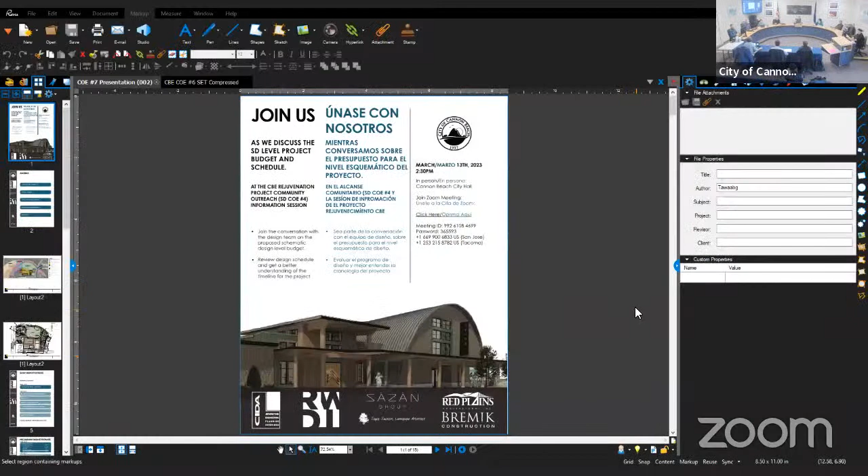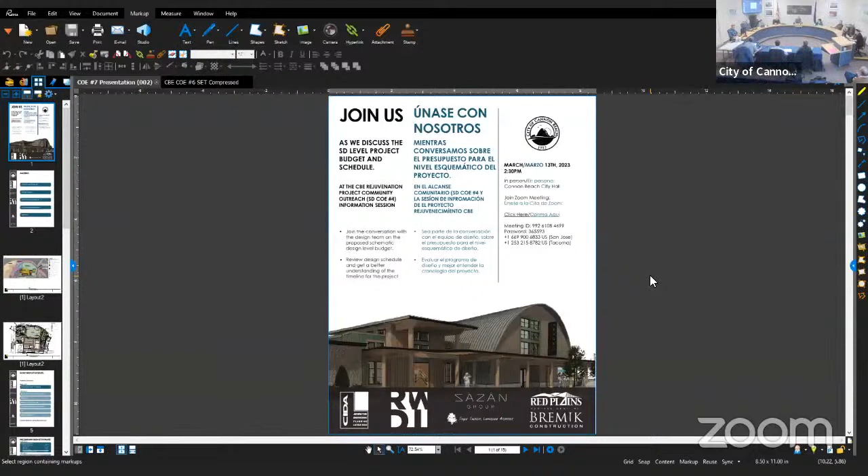The Cannon Beach Elementary Rejuvenation Project started off with a robust public input process that indicated there was pent-up demand for a facility on the Cannon Beach Elementary site that would be enjoyed by residents and visitors alike. Dustin Johnson of CIDA will go over the results in more depth in a few moments, but what came out of the effort were visions of capturing our local history, learning about Native culture, protecting the environment, bringing local folks together, providing a peaceful place to think, a place to exercise, and celebrating the elementary school that was such a big part of this town. That's what people talked about. And what Dustin is about to show you is what those things look like when brought together in the design of a facility on a site that also contains an abundance of all those good things.

Today's the first step in how do we really make this happen. We will have budget figures based on the preliminary schematic design drawings. These are rough figures and hopefully lean towards the conservative side. They will be refined as the project moves forward. With that, I'll turn it over to Dustin Johnson.

All right, thank you, Bruce. And I've been forewarned that my voice doesn't carry very well in this space, so if you're having trouble hearing me, signal me and I'll know to turn it up a little bit. I'm on the desk, there you go. Well, as always, I have to take the opportunity to just tell you how humbling and what an honor it is to be here working in Cannon Beach and on such a special project and a special site.

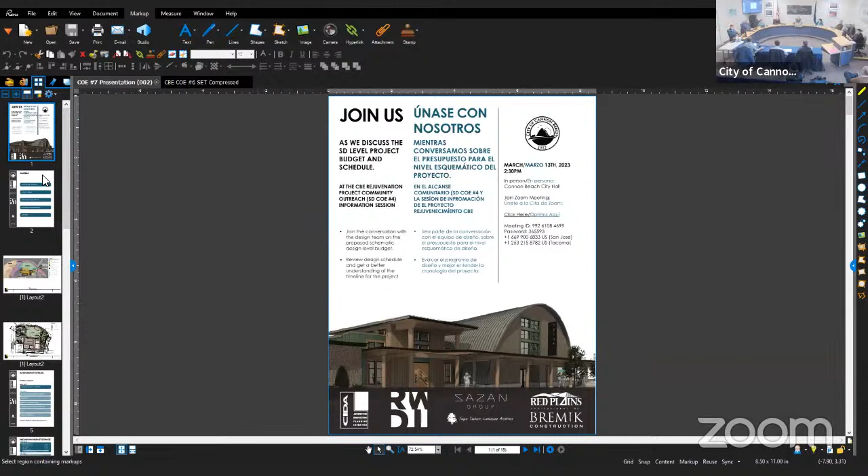So I'm sharing my screen right now, I'm going to zoom in a little bit. This is our agenda for today. Bruce just did introductory comments. I'm going to give you a little bit of history on the project, similar to previous COEs. Then we're going to talk about what all is entailed in a project estimate, what do we look at to make sure that we're capturing everything holistically. And then we're going to present our project-specific budget estimate for Cannon Beach Elementary Rejuvenation. And then after that, we'll talk about next steps.

Moving on down, zoom out here. This probably looks familiar to some, either because you were here during the programming phase and you saw this slide, or hopefully, for those of you who weren't, it resembles strongly the current design of the project. The programming phase happened approximately a year ago.

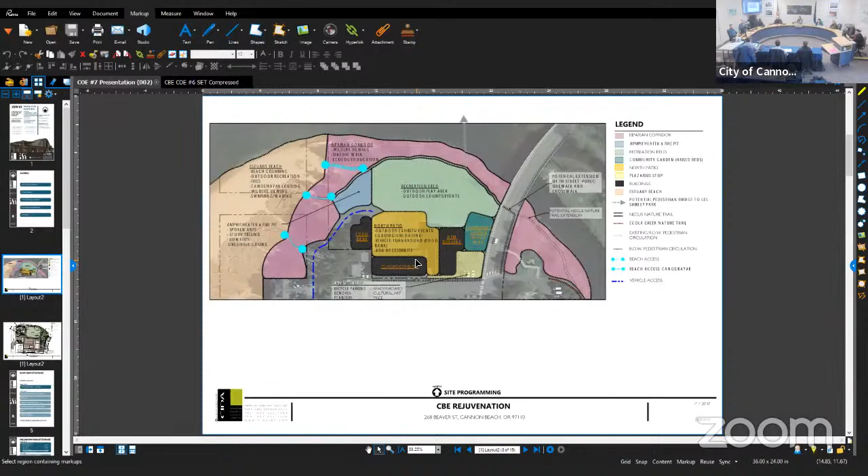It was a 2 to 3 month long process, involved 3 community outreach events. We talked to anybody willing to talk to us, took notes, handed out surveys, collected information, organized it, prioritized it. Out of that came this exhibit that you're looking at, including probably 1,000 pages of notes and surveys and other stuff, but all of that boiled down graphically to this site plan. Dustin, you blow it up. Thanks, you bet, okay.

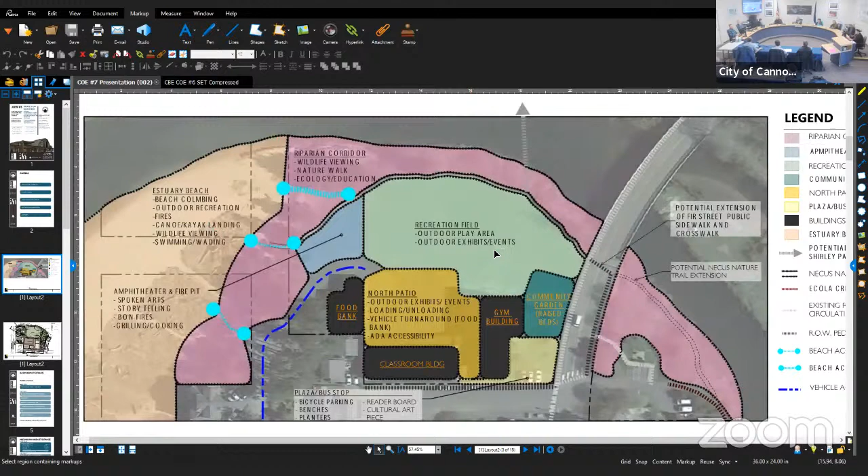You'll probably notice that bottom yellow block in the southeast corner of the site. That was an entry plaza that folks wanted, a place to be able to congregate at the site and start learning about the history of this site. The north patio is in gold, again another communal space, gathering space that could potentially host things that could bring tourists to the site. These could be exhibits, outdoor exhibits, they could be farmers market style events. I know you all have a current farmers market in a different spot. You see a community garden just to the north of the Southeast Plaza. This is currently where our Thunderbird garden is, and it has transformed a little bit from a community garden to more of a cultural heritage garden.

The recreational playing field is a huge asset currently for Cannon Beach, and no one wants to see that go. You see an amphitheater there in blue. It's been further defined with collaboration with the tribe, who had the original idea of having an amphitheater out here, at least as I understand. This was quite a few years ago.

In the current design, it's no longer just an amphitheater. It's an intimate storytelling circle and fire pit that can be expanded out to accommodate a larger crowd for something like a music event. And then the riparian corridor that you see in pink along the edge—another very important thing to stakeholders we noted during the programming phase was to make sure we didn't do anything that sacrificed that corridor.

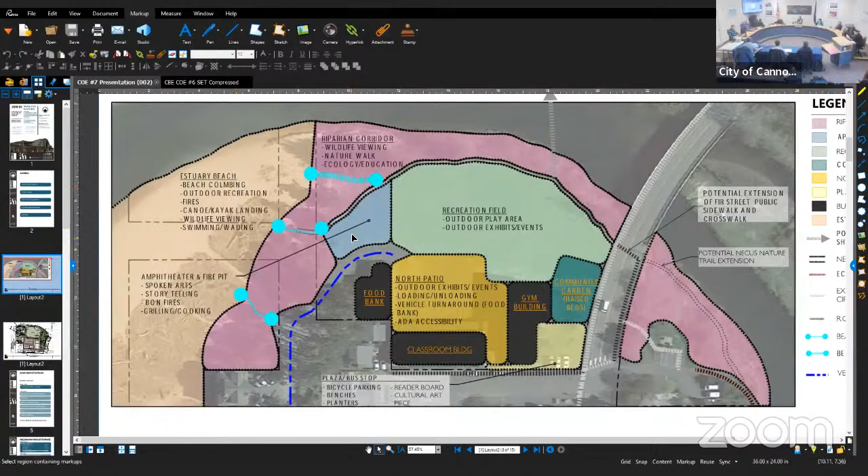So again, the Southeast Plaza down here at the southeast corner of the gym—a place to gather, an activation point for the site. Just to the north of that, our community garden, which has become the Thunderbird Garden, a heritage garden.

We have our north courtyard. Throughout the design process, we've added outdoor covered space on three sides of that north courtyard. You probably got sick of me saying it during design, but versatility, versatility, versatility—this was one way we can do that. We can have more outdoor events in more types of weather conditions if we have covered space.

We've got our amphitheater, which is now also an intimate story circle. And then, of course, Necus Park, the playing turf that's there today.

Scattered throughout, we also have some site structures next to a heritage playground that's part of the bigger heritage garden. We have an open-sided, longhouse-inspired structure—again, covered space for the outdoors. The more we have that, the more it's going to get used throughout the year. And again, over by the amphitheater, another longhouse-inspired structure, likely open-sided.

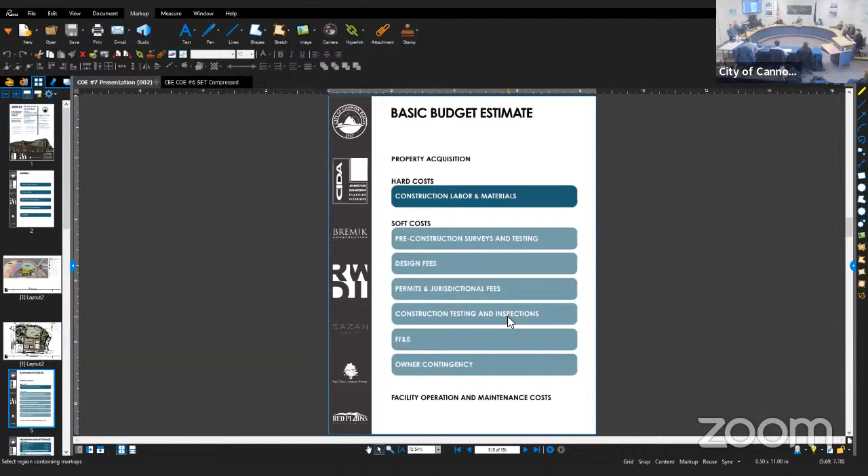And then we have an owner contingency. We always recommend that the owner carry a contingency for those unforeseen things. We do the best we can to make sure that unforeseens are kept to an absolute minimum. But it would be a mistake to say, don't worry about carrying it. So we always recommend at a very minimum 5%, even up to a 10% owner contingency.

And then beyond that, if this was a private development, we would be talking about facility operation and maintenance costs, and looking at the whole thing as basically an asset and making sure that this is a wise investment.

This is different because the ultimate goal here is twofold. It's to bring in more tourism and tourist-related dollars. It's also to preserve an incredibly special and historic site. And it just so happens that this type of space is going to fill the need and be a huge asset for the locals, both indoor and outdoor activities.

With that, we'll jump right into the budget. Do we have any questions at this point as to what we look at in a budget? Okay.

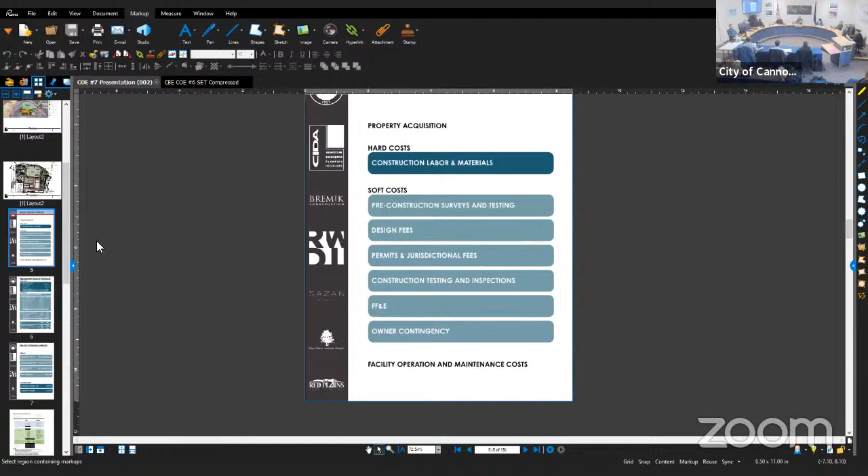I'm going to zoom in here. And Ben, I'll ask you to take it away with.

Of course. And I second what Dustin was saying. So we're also honored to be part of the team and to work with you all on this. So Ben, you want to introduce yourself?

Of course. So my name is Ben Carlson with Bremik Construction, and this is my colleague, Dave Brookings, also with Bremik. Dave will be the construction manager during the project, and I'm working on the front end side, helping to program the project for success during pre-construction.

So as Dustin mentioned, the construction hard costs, another way said, it's kind of all the stuff left behind. This is what it takes to build the project that's the dream of all of us to deliver for Cannon Beach. And what we've done is taken the construction hard cost and broken that down into these various different elements here. These are really a summary piece of what we put together for the estimate, which fits on the slide a lot better.

But just know that behind this, there's several thousand lines of data that we've worked hard with CIDA and the Cannon Beach team to develop for the project. And so we've really broken this down into these different elements here.

One is selective demolition related to the project. The actual building construction, which has to do with the redevelopment of the buildings themselves and the reskinning of all the buildings. The utility upgrades and site development kind of go hand in hand. There's a fairly robust site development portion of the project as well as landscape.

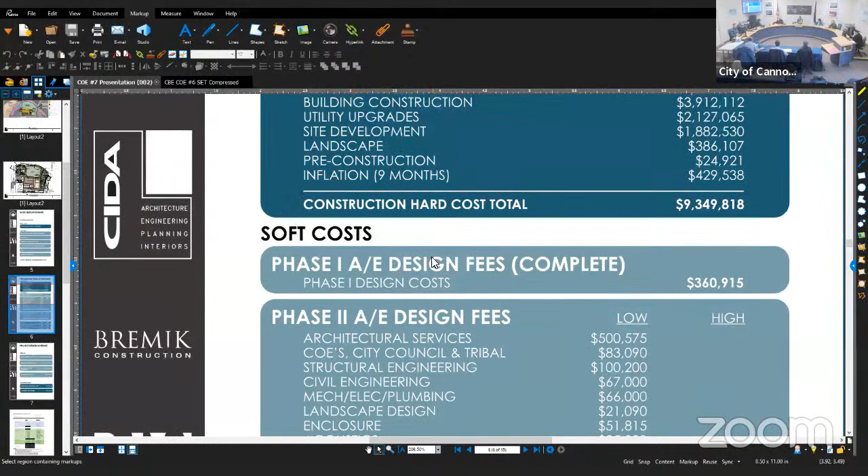So we move on from hard costs to our soft costs. This first number here, that 360,915, those are your architecture and engineering fees from day one on the project through today.

And this is not just CIDA, this is CIDA, this is Red Plains Civil Engineering and Planning, Joyce Jackson and her landscape team, Sazan with their mechanical, electrical, plumbing, RWDI with their sustainability studies, acoustical engineering, and their thermal envelope consulting.

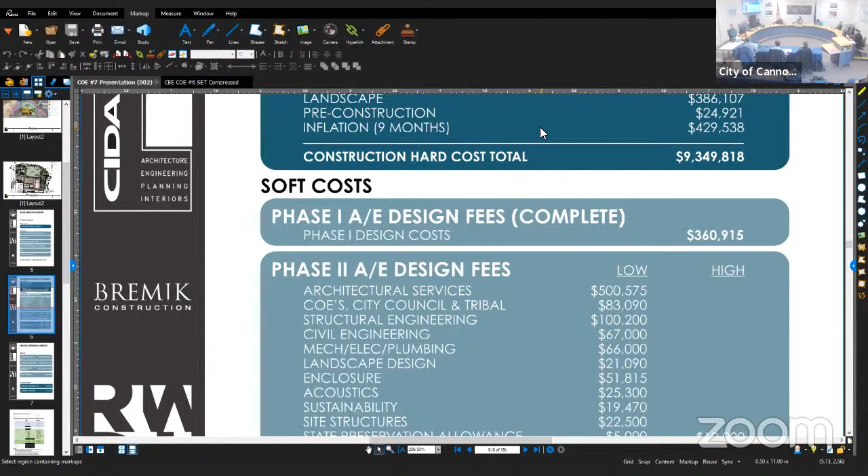We're not proposing making any changes to that design team moving forward. So as we move from phase 1 A&E fees to phase 2 A&E fees, we still have those consultants taking their designs alongside ours to that next level of working drawings.

We're factoring things in and separating them out now that we have a better idea of what the process is for this particular project, and no two projects are alike. This one, can't stress enough how unique it is from a process standpoint.

But we want to make sure we're looking historically on the types of events we've had, level of involvement we've had with the public, with tribal members, with city council, and we're carrying that through. So you know now with this budget, what to expect in terms of CIDA and our consultants and our involvement moving throughout the course of this project.

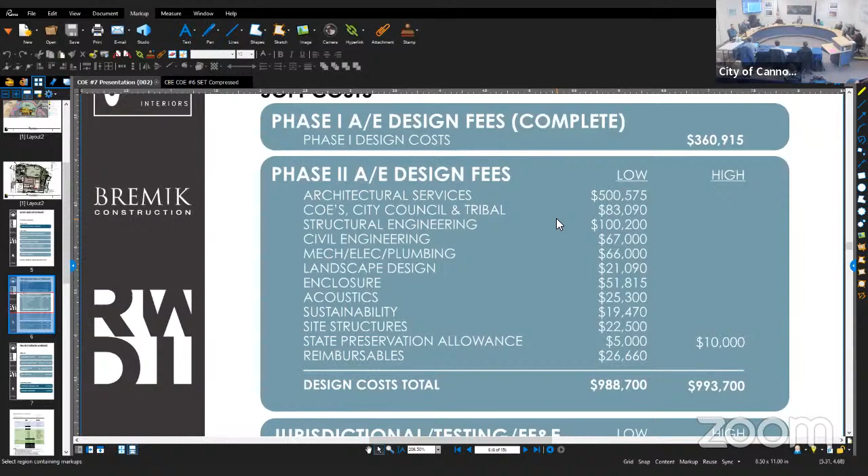We're going to work with Bruce. We haven't had a chance to really dial in our services and see if we need that level carried through to the end of the project. And we're going to be working on that before we come back to you with our revised budget. Bruce will talk about that in next steps.

Another thing that we have carried in here is the state preservation allowance. This is the State Historic Preservation Office, and they are who has jurisdictional say on how we're disturbing the earth out there on a highly sensitive archaeological site. They have their own process, which we're going to talk about schedule here in a minute.

Their process runs more or less concurrently with the land use process, but has some special caveats, and we'll talk about that here in a minute. There's a line item in there to carry that, to manage that process. Our consultants, Red Plains specifically, will be very involved in that as the civil engineer.

You carry a geotech engineer as part of the owner's soft costs. You already have a contract with them. They will be heavily involved as well during that process.

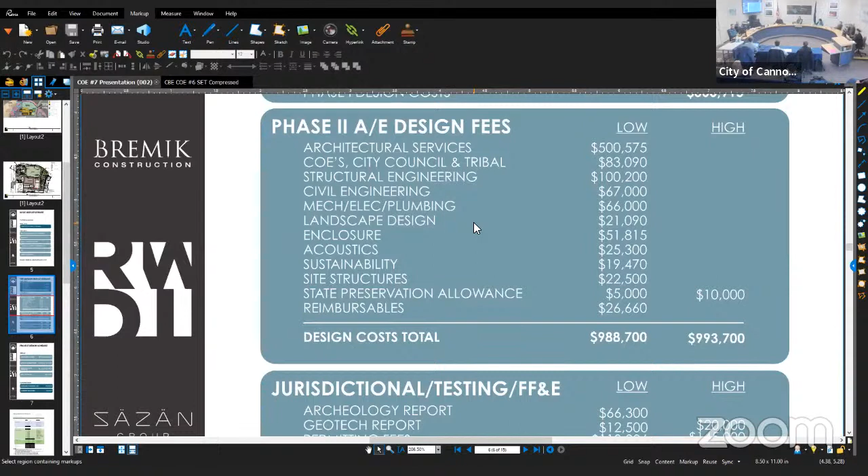And then jurisdictional testing and FF&E fees. Again, this is an extension of your soft fees, but these are not architecture and engineering fees. These are fees carried directly by the owner.

So again, your archaeology report tells us where we can modify the site and to what degree, what depths we need to start being cognizant of, but also what mitigation we have to do to be able to disturb the site. And that mitigation is something that has to be not only approved through the state, but also by the tribal members as well.

And then the geotech report tells us how structurally stable the soil is that we're going to be modifying. So even though we're not building a big new building on this site, we still have to take into account we have a seismic retrofit on that classroom building, or we're adding a couple of beams and footings in the gym, and we need to know what our allowable bearing pressures are. That test will also let us know if we can use the site for stormwater detention and release, to naturally percolate.

And some other things that we don't need to get into here. The FF&E, we talked about that.

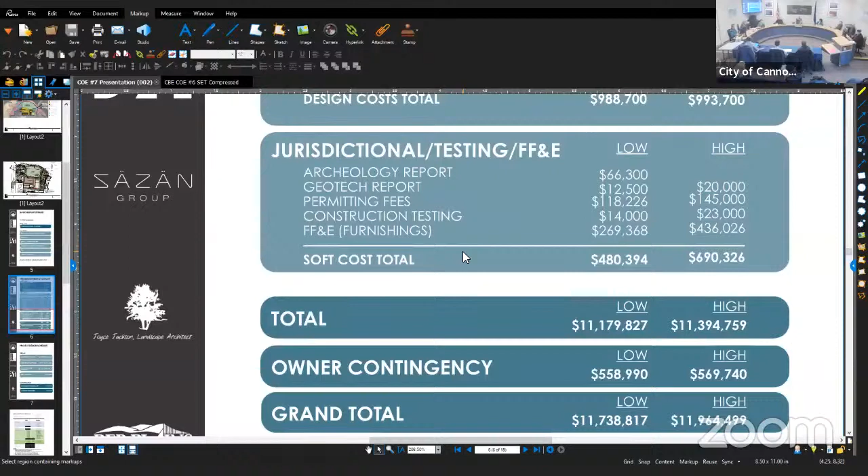Let me go ahead and just read this and then we can get into the questions. We're reaching the point where you can all get serious about deciding if this is a project the city can support and construct. Previously, there were too many unknowns to set a realistic budget. Next step is to investigate ways to fund the project, or to make modifications to the project design. We're ready for that discussion as soon as we can get it on your busy schedule. We will bring our financial advisor to discuss that aspect of the project in a dedicated funding discussion. Ready for that discussion, as I said, about the busy schedule. And I want to make the comment that both this project and the City Hall Police Station are doable, but it will take some bold action and a willingness to make hard decisions to make them happen.

So with that, is there any questions on anything presented?

Are we all in shock or what? Yeah.

And as far as the cost of the project, remember what we started out with is, what do you want to see? And hopefully we've accomplished those things, especially some related to education and the tribal history, and even the school. So that can be pulled back, but it doesn't take going too far back before all of a sudden it really doesn't work anymore. And those are some of the hard decisions you'll have to make. We'll make recommendations for you if you wish, but it is a council decision moving forward.

So earlier in the work, there was talk of phasing the operations. Is that off the table? No, it's not off the table, but there are probably chunks that we can go ahead and pull out and do them later.

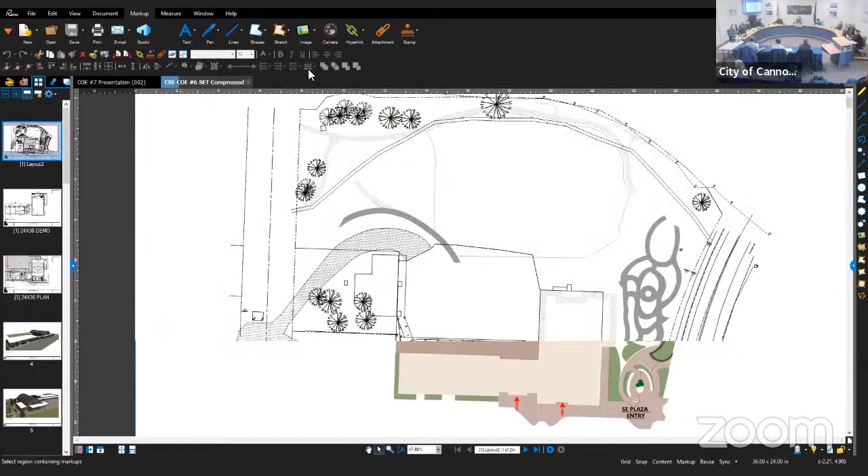Our next slide was showing how much of the existing school was going to be retained and incorporated. Justin, why don't you walk through that last drawing also? I don't think everybody has seen it all yet. Sure, through the site here. Yes, all right. Okay.

So hopefully this looks very reminiscent of that bubble diagram at the end of programming. We've always thought of the Southeast Plaza here at the southeast corner of the gym, right on the intersection of Beaver and Fir Street, as a place for people to congregate and to use that opportunity to activate the site. Driving in off the Fir Street Bridge, currently today, you've got a massive structure out there, one of the biggest in town, and really it's just quiet.

So in using this opportunity to celebrate a place of gathering, we had talked early on about making this a place to really try to activate and engage the drivers by.

Access just north of that is the Thunderbird Garden. This garden was developed in a high degree of collaboration with the Clatsop Nehalem tribe. It is intended to feature native plants that were valued from anything from medicinal purposes to crafts by the tribe.

In this area, those plants would have identification signs on them. And as you get out of the Thunderbird Garden and up further into the Heritage Garden and into that riparian corridor, it becomes you have the same plantings, but without that interpretive signage. So you kind of learn about the plants in the Thunderbird Garden, then you go out to discover them yourself beyond that.

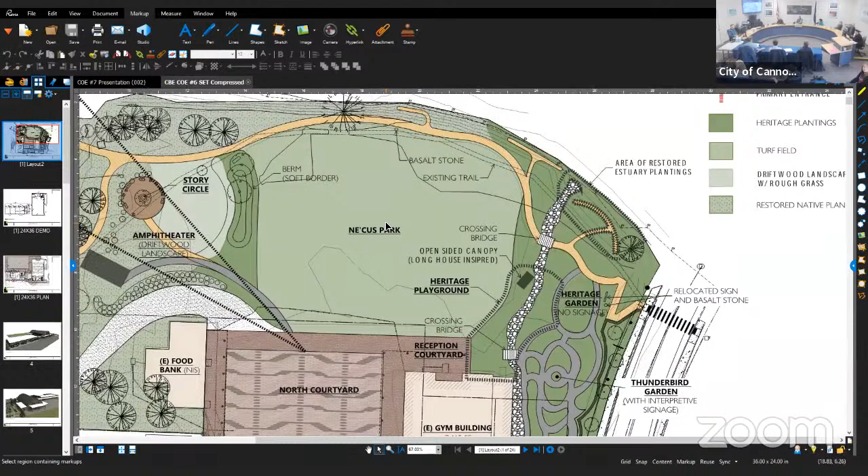And then, of course, Ne'Cus Park, the playing area, the playing turf, largely unmodified from today. And then to the west of that, our storytelling circle, again, developed in high collaboration with the tribe. Having that circle be a small, intimate space for reflection and storytelling, but also to be able to open up, what we have proposed is a driftwood landscape where people can sit, but not on anything so formal as benches and seats. In an effort to open that space up to a grander type of event, bigger audience.

I can just jump in quick. We're already collecting driftwood, yeah. We had a good season for driftwood with the storms. So a lot of that you see on the beach all of a sudden will be disappearing. Getting ready.

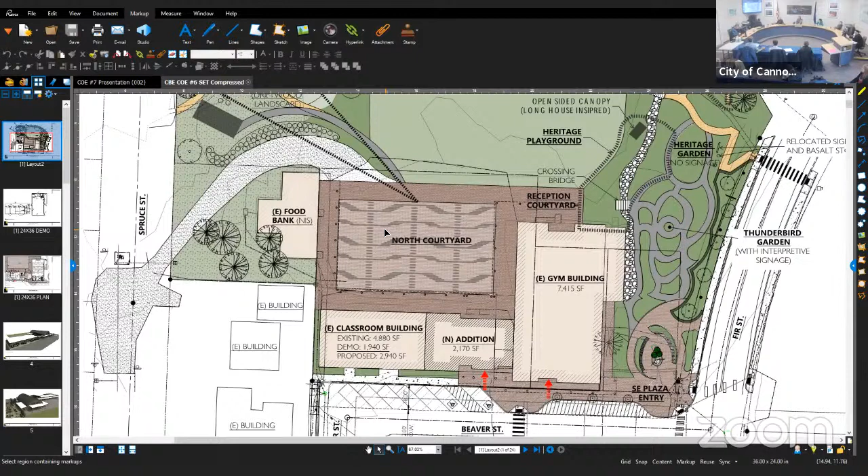And I think the last thing I'll point out on the site plan is the food bank. This was another one of those humbling areas where everybody seemed to coalesce around. The food bank is important, not just for the locals who use it, but extremely important for the tribe. They see this place as a place of giving. This was a stop for adventurers on their way up and down the coast, and they would show the necessary respect for another tribe. They would be given shelter, they would be given food. They see the food bank as an extension of that value.

All right, this is our existing plan. Just another thing about the food bank - one of the things that's always troubled us is that if we put restrooms in here, there's a whole beach area that is not served by a restroom. That's not the right mix if you're bringing in kids and everything else with something more formal. So what we've come up with is to put the beach restroom on the backside of the food bank, so that's where everybody goes in and out. That's something we're trying to do to avoid that potential conflict.

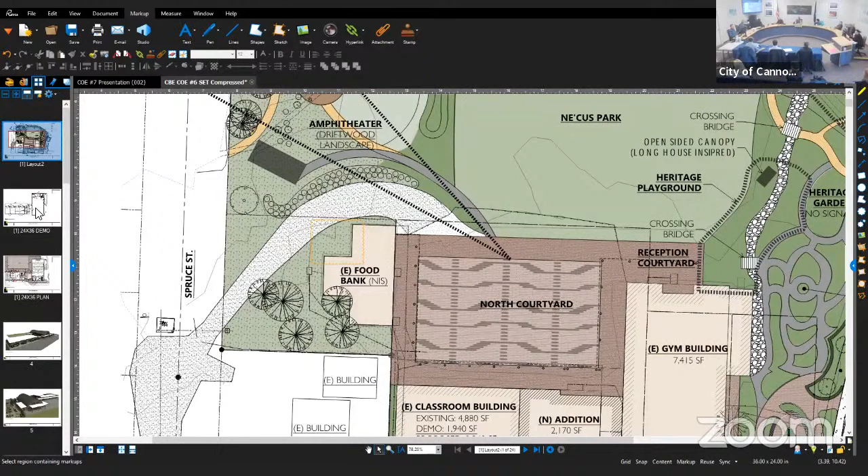I'll just draw a little cloud around that area so you know where Bruce is talking about. I think that's the corner you're talking about, because that's away from those spruce trees - someplace in there. I don't know if it'll be attached to the food bank, but the idea is there's a place that will get that service, but not necessarily coming into the lobby of the facility. Bruce, that is not in the scope of the project right now, though.

No, nothing that - the food bank is not. It'll be made part of their contract, but it'll be paid for out of the general fund. We really haven't talked about the funding side of the restrooms. That's something that could be within the scope because it is tourism related, so it's possible it'll end up there. Right now, we were just trying to sort out the potential conflict.

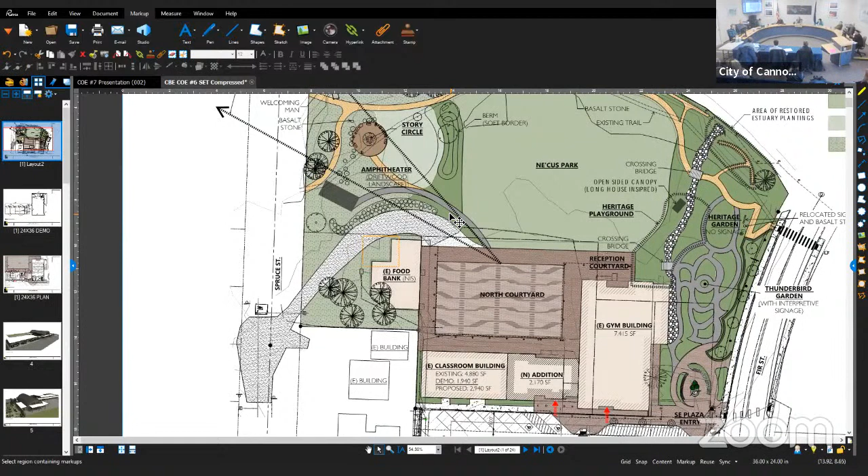So the demolition plan - in our existing building analysis, we determined that the existing mezzanine at the north end of the gym is highly unusable for anything on that second level or mezzanine level. The reason was twofold. Structurally, it's not capable of holding storage or anything else usable for that space, maybe a little light storage. The bigger problem was accessibility. For anyone who's been up there, there's probably 6 or 7 different floor levels that are abrupt, or in some cases upstairs, or a ladder or a couple ladders. So when we look at the type of mezzanine for this place, we want it to be more accessible, and also not at this end of the mezzanine.

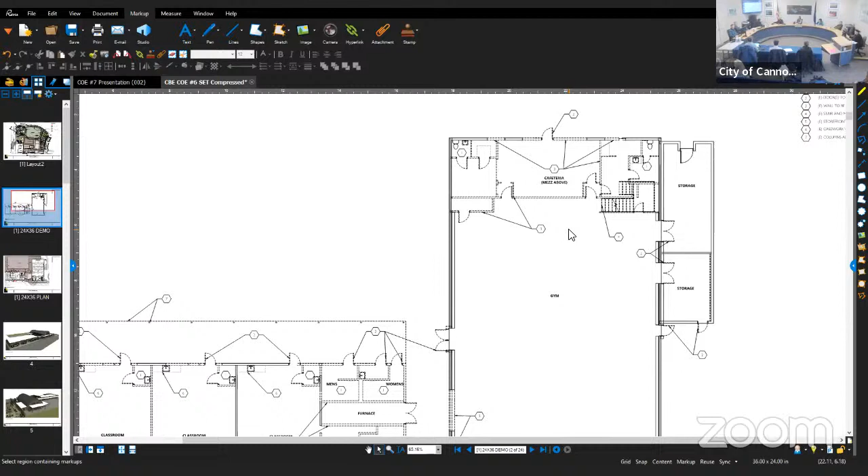That was another big piece of the programming puzzle. When people envision this space and envision being in it for whatever function is going on that particular day, they want to be able to see out the north end towards the estuary.

Over here at the classroom building, you'll see the existing breezeway is only about 12 feet wide. So we looked at schemes where we had very little demolition of that existing classroom building, but 12 feet in width was just not enough to do what we felt needed to be done from a cultural heritage standpoint and using our CBE entry lobby to educate visitors of this site. So what we proposed was removing that first structural bay - this is where existing toilet rooms, the furnace, all the electrical equipment, and a few offices are located - and then building that back and attaching the two structures together.

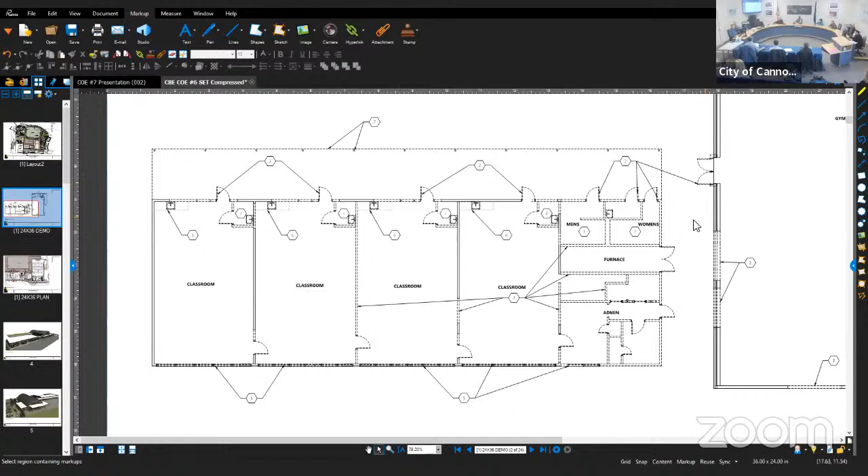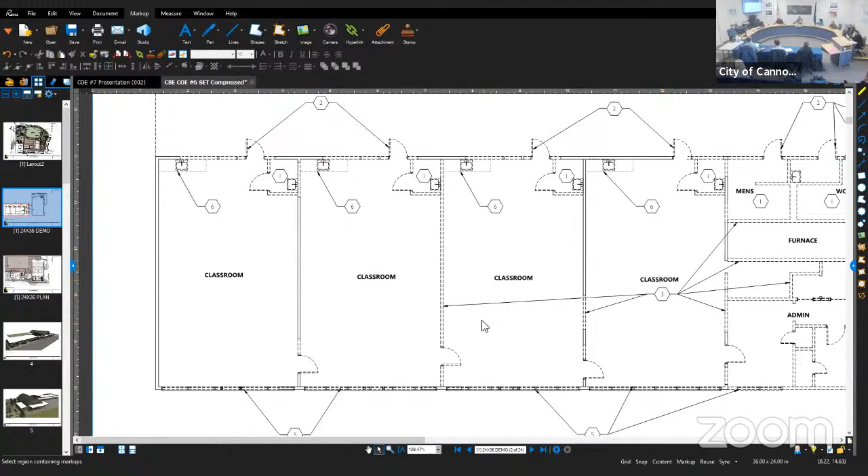You see one wall over here proposed to be demolished between these two classrooms. That would be built back as a folding partition so that two of these classrooms could be opened up. You could go from having an event space of maybe 25 to 50 people in a single classroom, to 50 or 100 people in these combined classrooms. And then scaling up from that, you'd go to the gym where you could have potentially a couple hundred people or more.

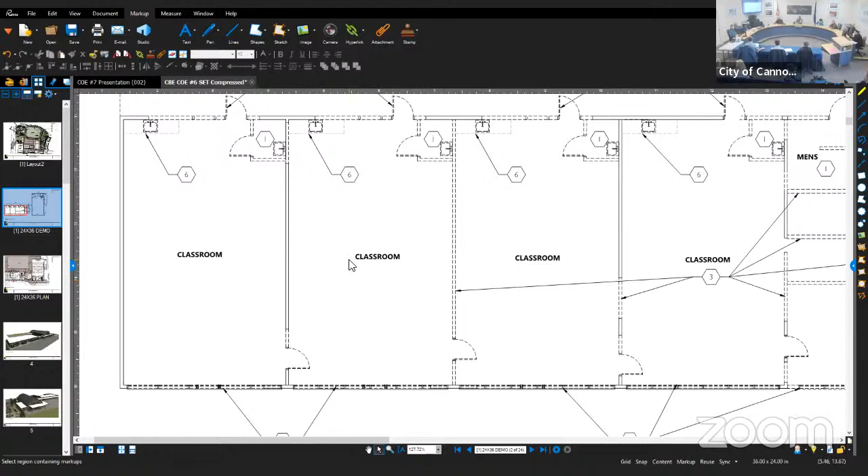You see a lot of dashed lines on the classroom building because these existing windows, those storefronts, are steel single-glazed, which doesn't meet current energy code standards. We have to pull them out and put in new ones. We also have the seismic upgrade, so we need to add more stud wall and less glass, specifically on the south side, to make it work. The seismic upgrade for this building and the roof has already been completed on a different contract.

Just to clarify, the seismic upgrade for the gym has been completed, and the re-roof for the classroom building has been completed. So the gym is done, not the classroom. The roof for the classroom building is done, but the classrooms themselves have not been seismically upgraded yet. That's in scope for this project.

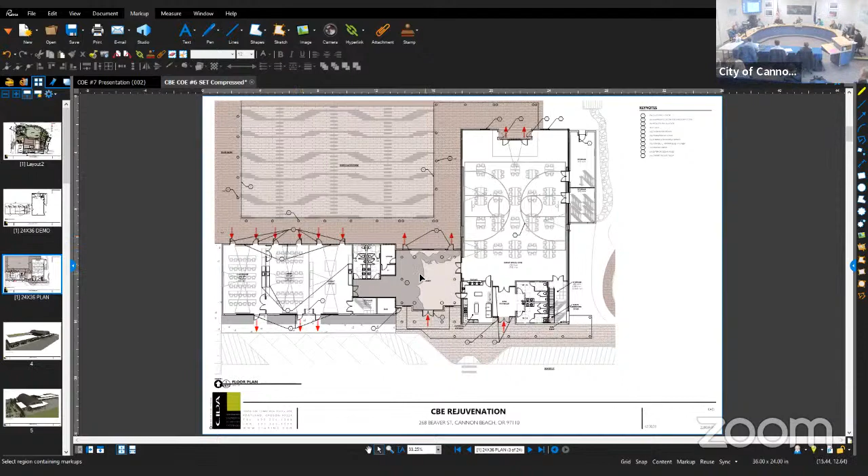Here's the floor plan. I'll zoom in here. Again, we took that existing mezzanine off the north side, so now we can open up the north end of that building to views of the estuary. Down on the south side, we added a mezzanine back in. We need a place to put mechanical equipment for both the gym and potentially the CBE lobby. The only place this has a mezzanine, I'll clarify—you see that main gym vestibule entrance right there?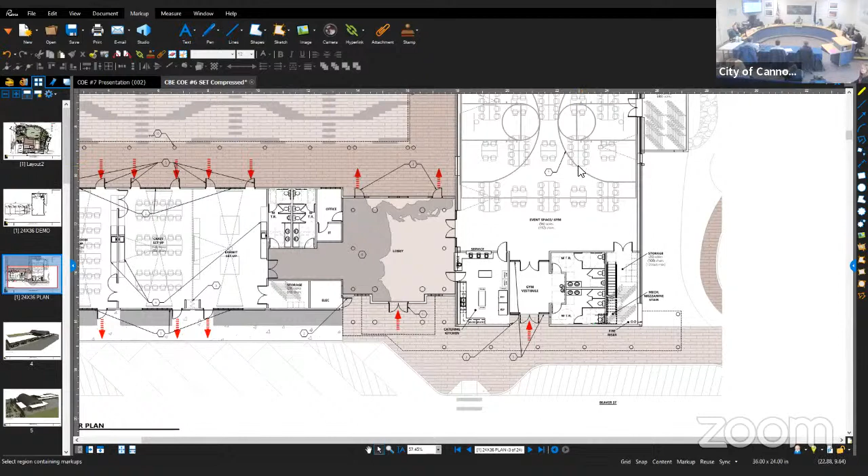That's envisioned to be open to the roof structure above. So to the right of that, over the men's and women's toilet rooms, we're proposing a bit of a mezzanine. The other thing that mezzanine would function as: from time to time, hopefully more often than not, you'll have events in there that need to be supplemented with stage lighting and audio-video equipment. So we envision a back of house office up there where someone can control those things behind a window, with kind of a bird's eye view of everything going on.

The CBE lobby itself is intended to be a very tribal space, but also a versatile one. You can use it as another classroom or as an art exhibit, but the stuff you can't roll in and out of there, that you can't take off the walls, is the history of this place that the tribe wants to tell. We're showing a kind of fun little map on the floor in this image, depicting the northwest corner of the state. There are several significant landmarks within this that are valued by the tribe and their ancestors, so part of the interior of the lobby space would point those out at the floor level and then project that up on the wall with other exhibits giving more information and detail about those landmarks.

From that space, it opens up into your first classroom. That first classroom can be opened up into the second classroom. The classroom on the far end would be its own approximately 25 to 50 person event space—again usable for meeting rooms, art exhibits, crafting, or workshop space.

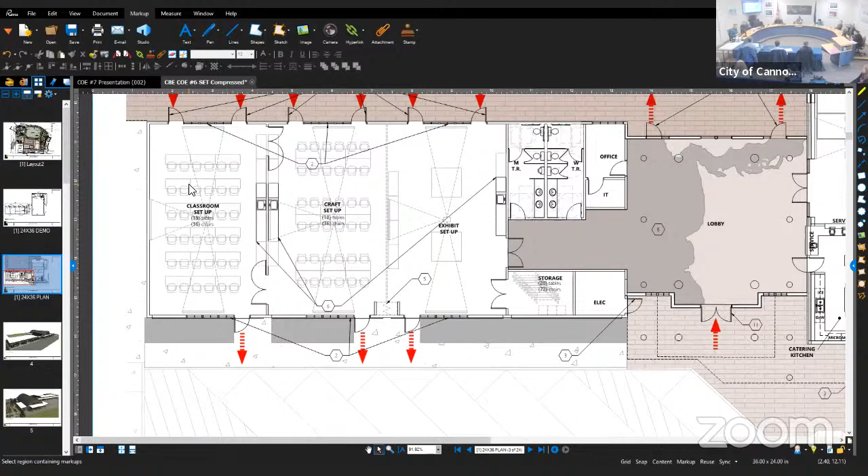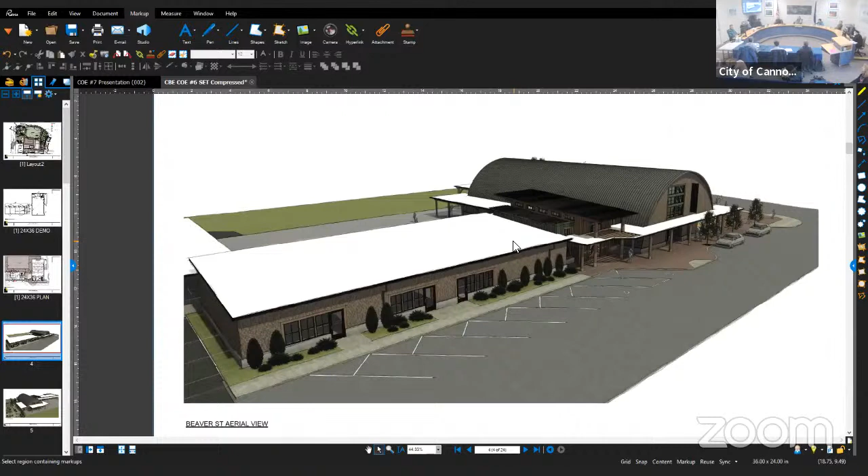And then we go from that to what we designed as the exterior architecture. I made the comment last time that I'm not going to spend a lot of time on this slide. It's there for scale, so you can understand how big the CBE lobby is relative to the classroom and relative to the gym. The reason I don't like to spend much time on this is the white roofs, which you'd never actually see at ground level—they really would be white. It's an energy saving measure, we call them cool roofs. You can get them in different colors too, but without me explaining, someone might look at that and wonder what I was thinking, since it doesn't snow in Cannon Beach, or only very rarely.

Same thing on this side, showing you everything in context and in scale.

So then we jump down to an eye-level view of the southeast courtyard, looking back. Again, I want to reiterate these are schematic level drawings. There was a comment that we're showing a lot of hard surfaces for sitting around the welcoming lady who's standing up above, welcoming Western visitors to the site facing east. We're not proposing final materials here; we're going to develop that closely with the tribe. They have a specific value in building materials, especially in these tribal-focused areas, of using materials that would not have been unknown to their ancestors. We're going to try not to use concrete and steel in those types of spaces, specifically the Southeast Entry Plaza and the Storytelling Circle.

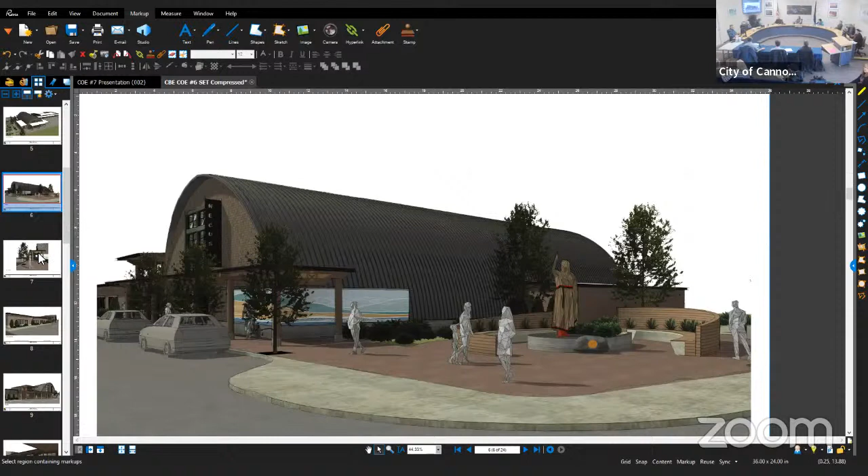Let me show you, we've taken the entrance to the CBE lobby and extended it out to the Southeast Entrance Plaza. We did that for a number of reasons. It was significant to the tribe that we had that. It offers a threshold to that CBE lobby that extends out to that point of origin on the site where we start to tell the story of the Clatsop-Nehalem and the significance of the site.

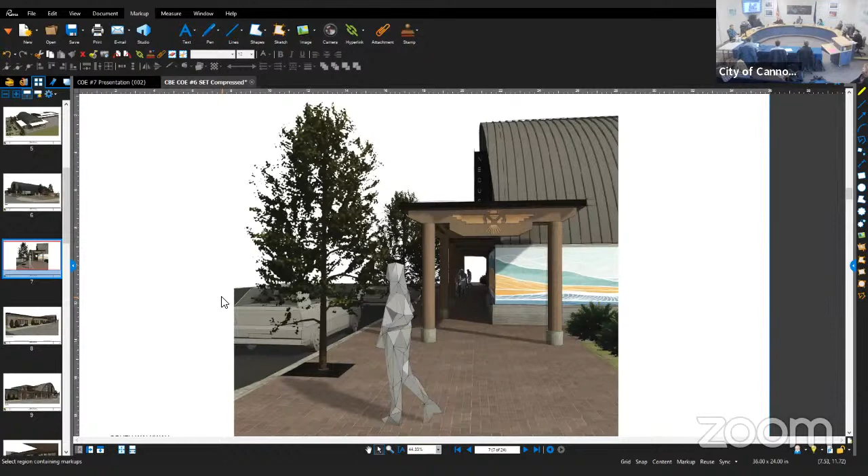This is standing back at the classrooms again on Beaver Street, just looking towards the northeast. We talked a little bit last time about how the existing school has brick veneer on it, and it's not really a material you see a whole lot of in Cannon Beach. When we do our seismic upgrade, we're going to be pulling almost all of that brick off just to be able to accommodate the upgrade.

So we're kind of offered a new canvas, and to help make this place feel a little bit more... we still want it to feel like a school, like a former school. But how do we make it fit into the vernacular of Cannon Beach architecturally?

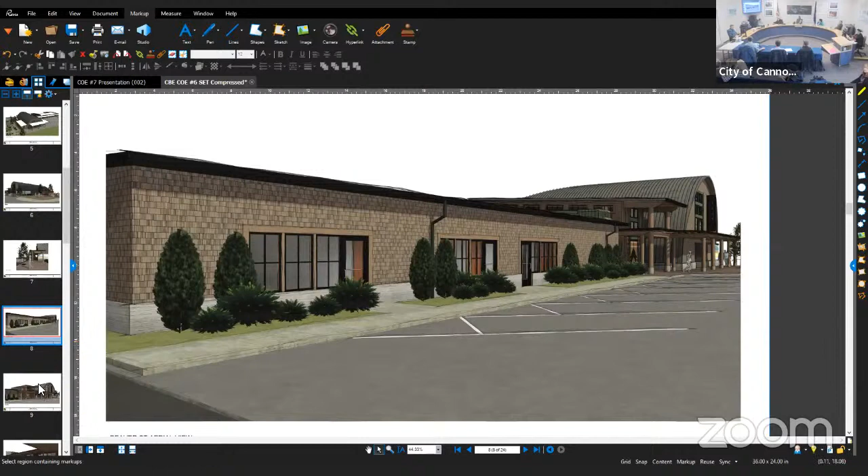And then here's an image of the new CBE lobby. Again, this is the 12-foot wide breezeway, and then taking over that first structural bay of the classroom building, which would be reconstructed as the CBE lobby. It's the gateway to the back of the site, and it offers a transition, an indoor transition from the gym to the classroom building and vice versa.

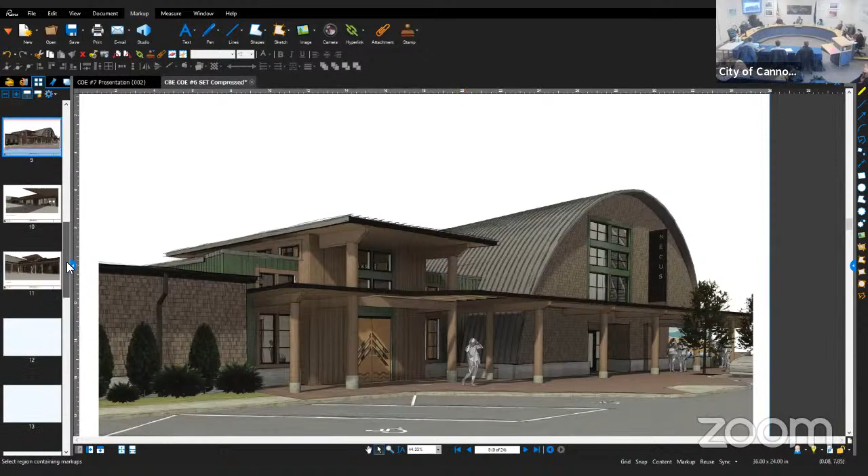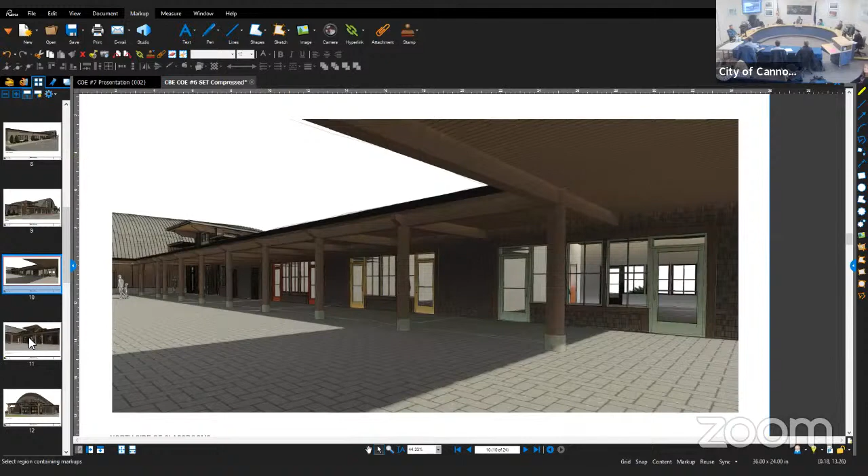Standing a little bit closer to the entrance, again in the north courtyard, looking back at the CBE entry. And then we had shown a couple of options for the north end of the gym to consider and think about.

We talked a little bit about how it was important to folks during the programming phase that the north end of the gym not only open up visually to the estuary, but also physically open up, being able to have a space that internally could support 100, 200, 300 people, but in nice weather could then extend out and really become a nice large venue for a variety of purposes.

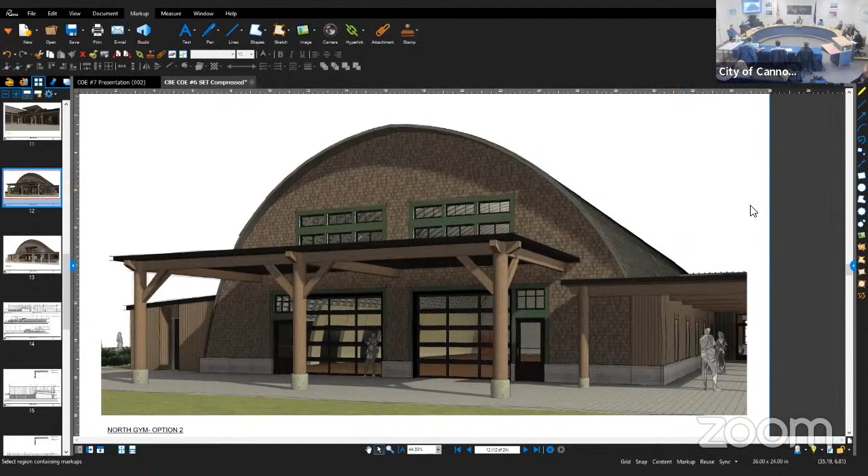And then this one here, again, the north side of that gym building—this time it's opening up with swivel doors. That's what you're seeing; we're showing them here as 5-foot doors. In retrospect, I would have made them 7 feet so that when they pivot on their center, the opening on either side of that door is big enough to meet egress purposes.

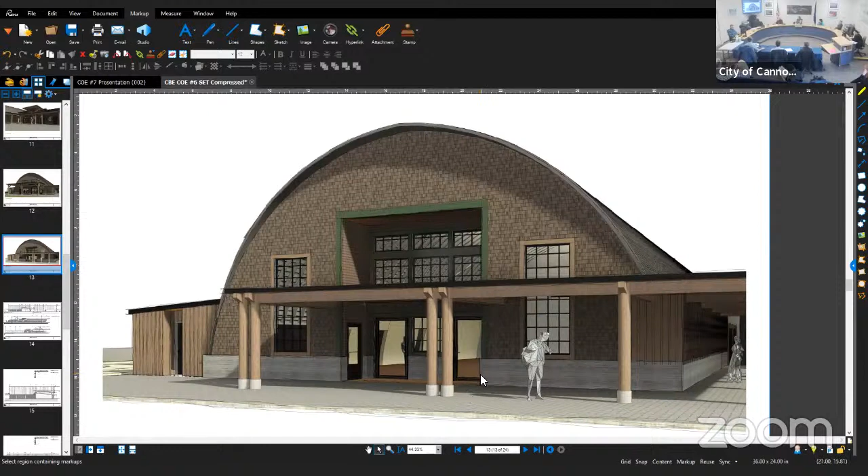And then the rest of these we didn't go into in detail because they're more technical drawings for the handful of folks that want to see more of the details—like what's your top plate height, what are the windows you're proposing.

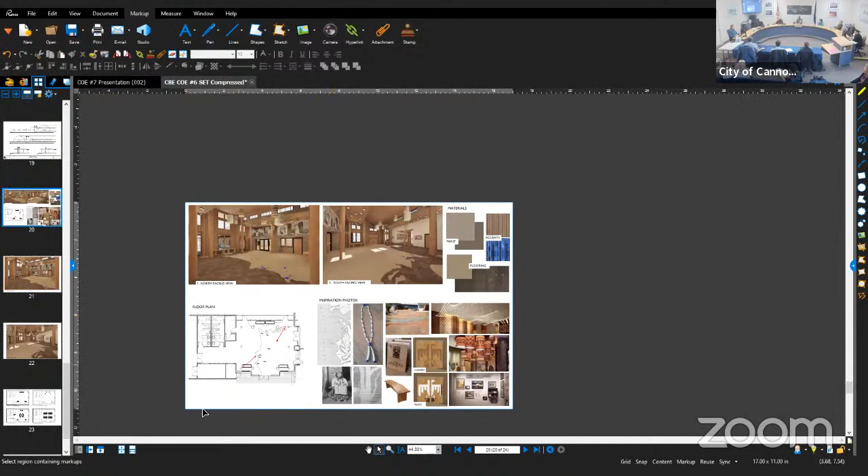I'd like you to show the lobby. Yeah, so this is the interior lobby.

I was going to put Maya in our office on point here—it's going to surprise her, but it looks like she had to drop off. She would present this very well, and I'll do my best. So, I'm here, Dustin. Yes, amazing. All right, take it away.

Yeah, so this is just really trying to show all of the elements that we've been talking about with the city, with the tribes, with everybody. And again, making sure that this is a space that really conveys the importance of this site.

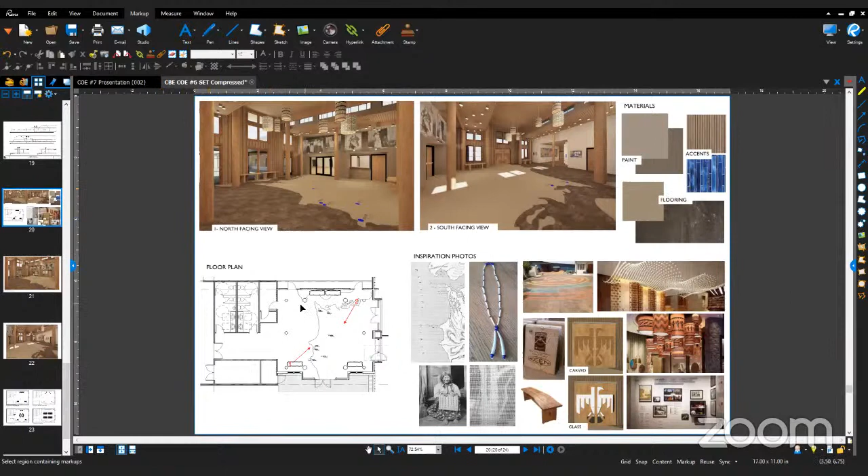So as a quick introduction to the sheets, I've got the pretty images there towards the top of the page, but the rest is really to show you some of the concept ideas. We've got inspiration photos showing some of the lighting features in the rendering. A lot of these speak to the natural elements as far as the wood, the land, and the ocean.

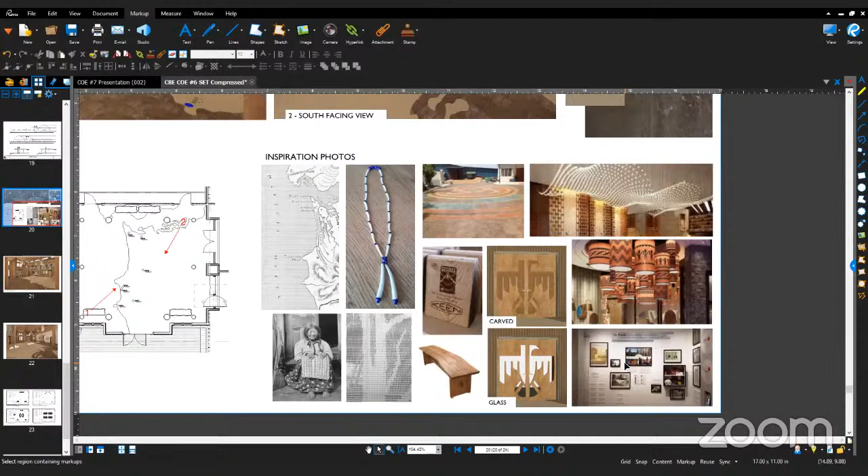The one image there has the basket weave lights that we are showing just as a representation of what that actual basket weave design is. We're hoping for quite a bit of input from the tribe.

The carved door in the middle shows a couple of different options. Our thought was the main entry into this lobby space really wants to speak to the tribe specifically, and the Thunderbird is obviously a very important image. So there's a couple options shown, whether it be a carved door or a glass insert door. Which way that goes will kind of evolve as we go through the conversation.

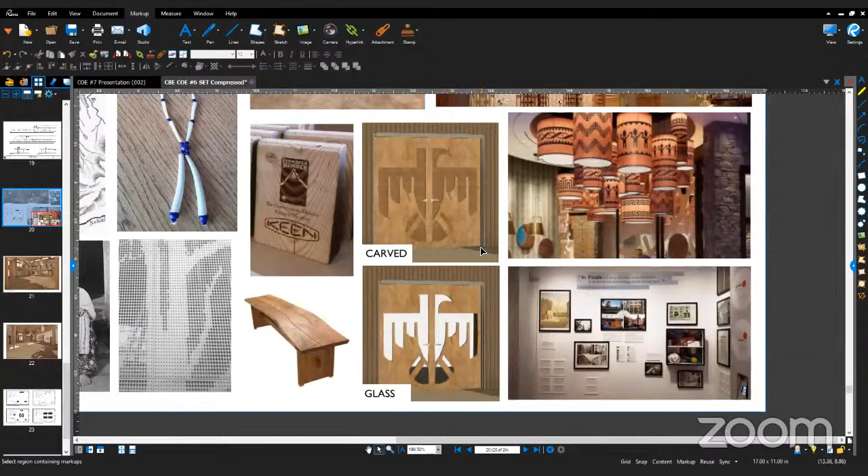Sorry, I'm going to try to turn on my camera too, so you guys can at least see me. I don't know if the lights are working.

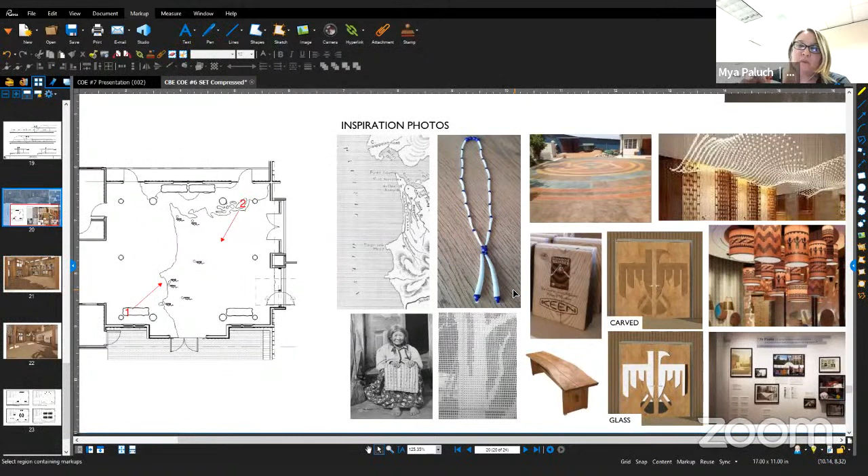Then we also have the necklace there, the beadwork. Again, this is an important bead, an important color for the tribe. So we're trying to show that in the space in ways that allude to it. Obviously not highly representational, but just little ways to hint at it.

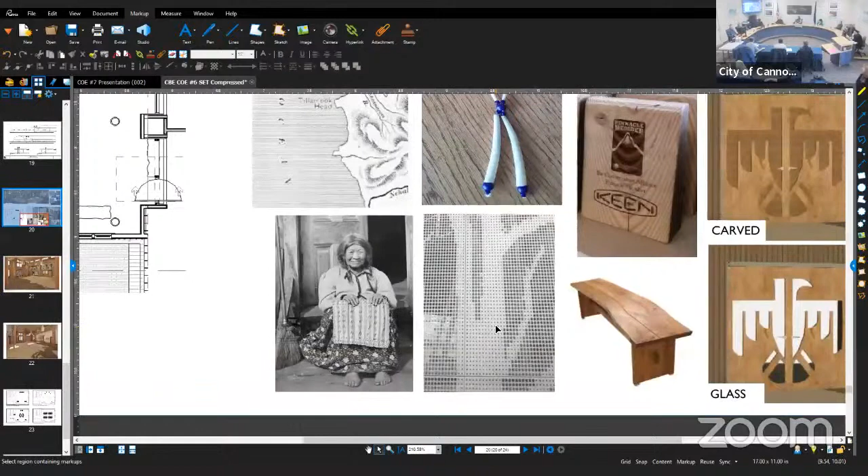Dustin, the one below, refresh my memory - what's that little piece? Is that a close-up of the images? Exactly, that was showing a way to screen print onto transparent material to create these photographs on a larger scale. So that's a close-up, and right next to it is an image. When we look at the renderings, I'll direct you to where those are.

And then above that is the map of the coastline. Our thought on that is that image goes along with the floor plan right there, where you're going to see the coastline. You're going to see these areas that are of importance, with historical names, current day names, tribal names, all ways to help people really see where we're at and understand the importance of all these spaces.

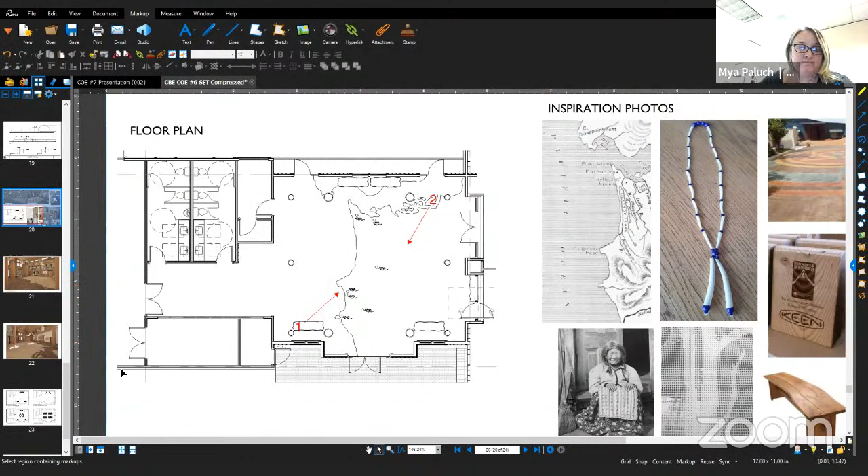So this is an image looking towards the gym building within that lobby. You'll start to pick up some of these elements I've talked about, where you've got the basket lights hanging, and other lights hanging that are kind of in a wave motion as far as height and undulations. Those images in the far background are black and white images.

We're considering those being printed on resin, and they're standing off vertical off the top of the lower portion of the wall. And then that barrel vault is pulling away from it, so you have a play on light from behind it so that those would stand out more.

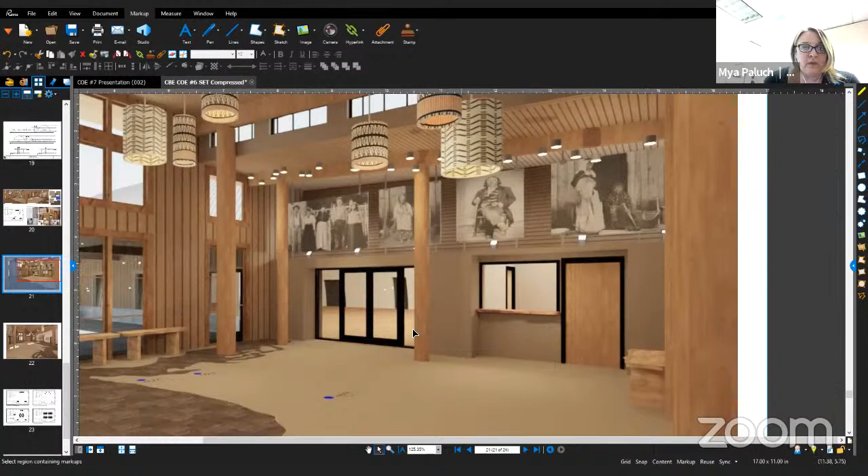This whole space, we're showing a lot of wood, again speaking to the tribe's influence, but also just the area in general. So you've got some wood on the walls, you've got the raw poles for the columns, and you're seeing the underside of the car decking. So it's all very warm and natural.

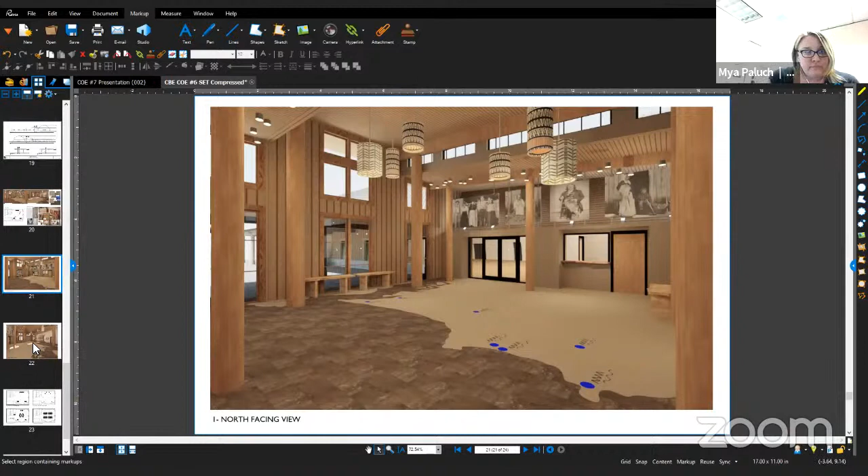And then this is looking back towards the main doors, so you again are going to see that carved main door coming in with that Thunderbird image on it - again, what that image actually looks like. This is a starting point for us to have that conversation.

What you're also looking at on this view is looking back towards the classroom entry. We didn't want that to feel like an afterthought. We wanted definitely to draw people's eye and attention, so we're showing some of those accents in there. Again, you've got those tiles that are mimicking that beadwork - nice, bright, bold cobalt blue, and the light colored tiles as well.

Again, what the design is, we're not quite there yet, but these are representations of those elements. That space also, we're showing the wood on the ceiling there too, because it does drop down a little bit, so that again gives it an identity.

Then you also have the presentation boards that are up on the wall. Our thought was those would have a tile backer to it, that they're actually inset and permanent, but the applied placards that might be on there might be something that rotates out from time to time. You might have a few that are standard, but some of that could change with events or exhibits that you want to showcase.

And then the flooring, again, showing that insert. Our thought here was you have that cobalt blue insert there, and that could relate to one of the images or informational pieces that are in those presentation walls. So as you're walking through the space, you look down, you notice something, and it points you to a place to go find more information. It's a very engaging space.

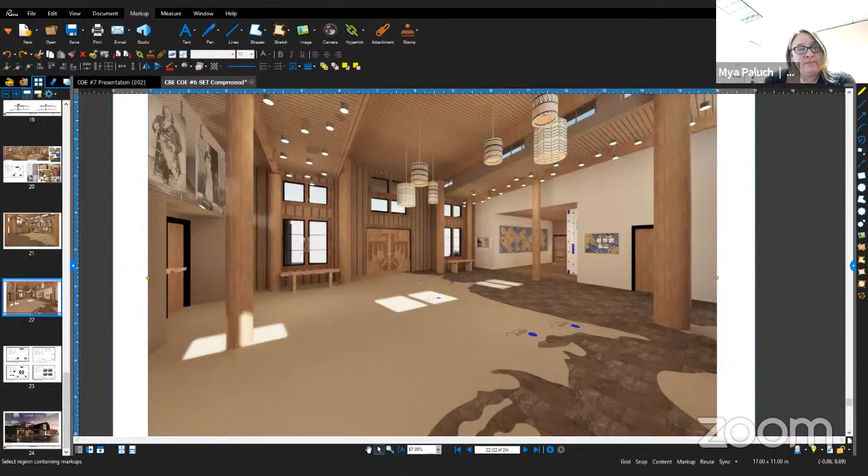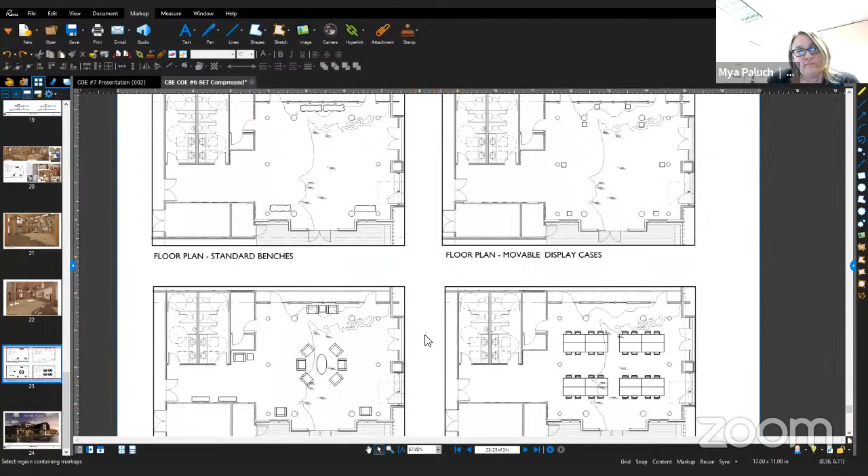This is just trying to show you the versatility of the layout. Our thought is that all of the furniture pieces are mobile, so they would come and go to suit the needs for whatever you have going on at any given day for any given event. So just showing some ideas as far as standard benching or display cases set up for an exhibit, or perhaps a training session, or just more of a lobby area. Again, back to Dustin's key about versatility, versatility, versatility.

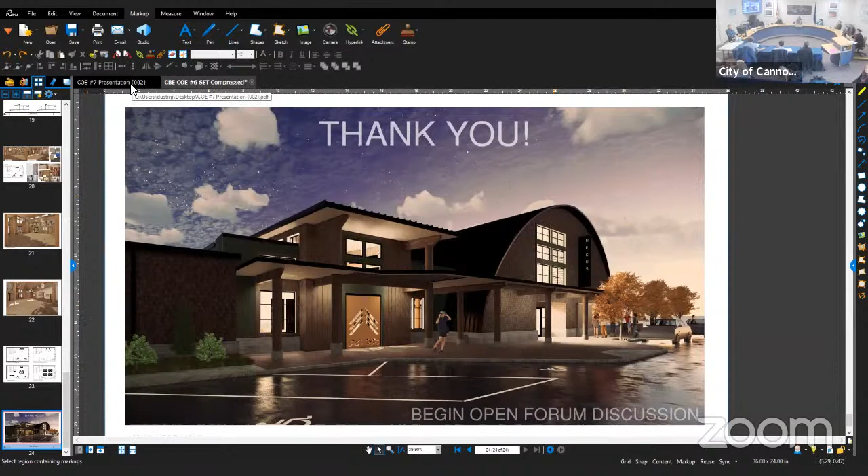Dustin, you have this schedule. I was thinking that would be helpful to answer the question that was being asked. Yeah, so Jennifer just read my mind.

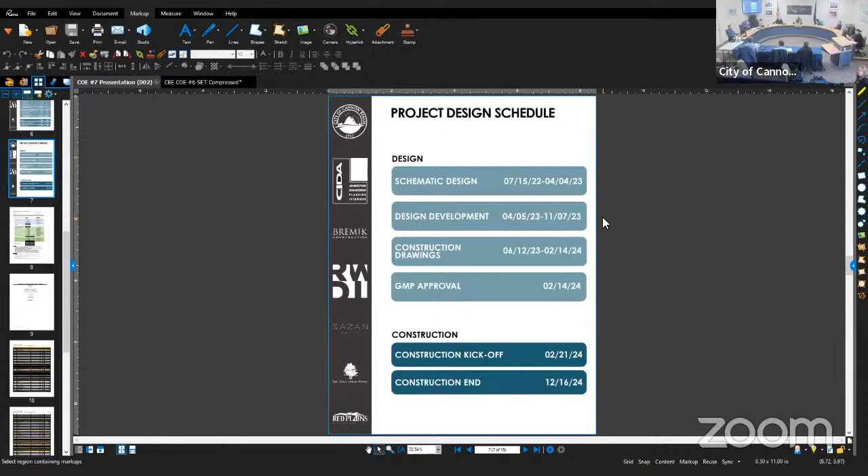The project design schedule, we have a very schematic schedule here. This is based off a very detailed Gantt format chart that is difficult to look at if you're not used to looking at them every day. So we made one that was a little more friendly.

This shows schematic design, and I'll clarify the names of some of these because they're a little misleading. Schematic design actually incorporates the programming phase as well. So programming and schematic design was approximately beginning of July to...

4/4 this year. That 4/4 is, I don't know if we have it on the schedule yet, Rusty and Jen, or if that's... We talked about taking it to the council meeting, but I don't know if we have it on there yet. Okay, it's beginning of March. Beginning of April. Oh, we just have City Hall on that. That's the fifth. It's right now a conceptual date to come back to you.

After we've had a chance to tighten up our numbers and take into account anything that you may want to see. You may tell us to leave today and come back showing you some cost-reducing alternates, and we would come back with that information.

Design development, that's what we are wanting to move into. So we're at the tail end right now of schematic design. That meeting shown with you on 4/4 hasn't been scheduled yet, and it will probably flux within. We would seek authorization at that meeting to, based on the current figures, the budget information and the design, move forward with the next phase of design, being design development.

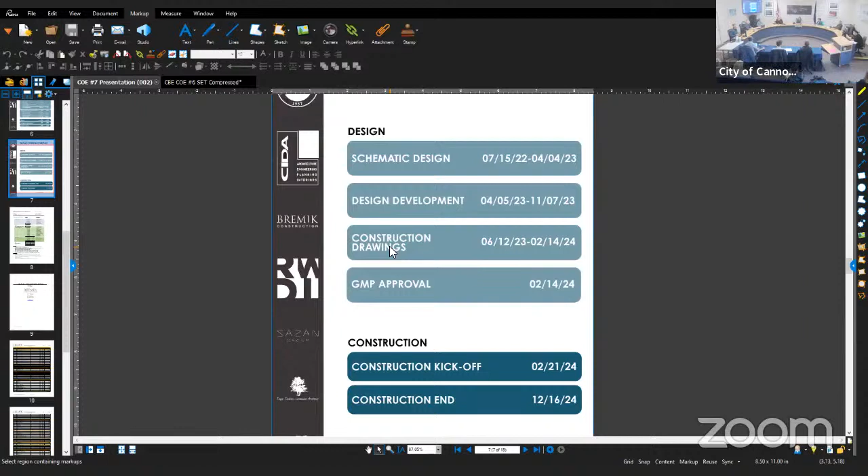But for construction kickoff, we have that as an anticipated February of 24 start. And we're tracking a 44-week, or approximately 10-month, construction duration from start to finish of the project. So that has delivery in December of 2024 and open for business.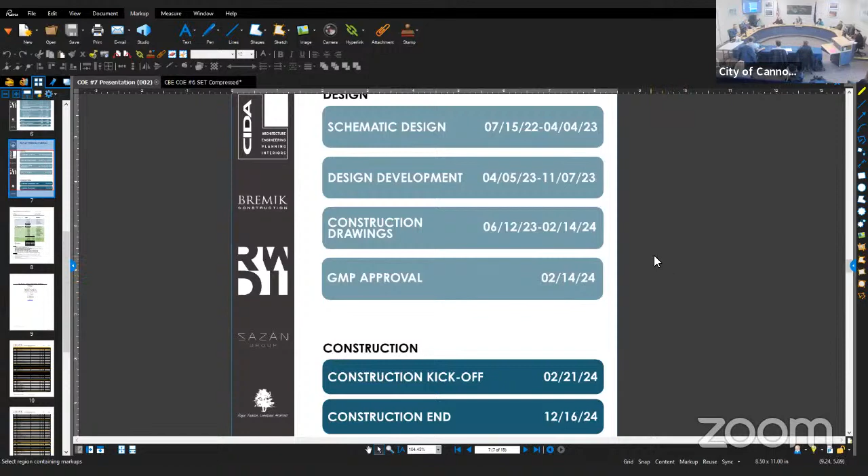I was a little bit cruel before the meeting. I cut out a week from your construction schedule, so I didn't have you ending right before Christmas. That's probably nice for everybody, actually.

And I'd like to add something. Some of you weren't here when we were going through the process of selecting an architect and then selecting the CMGC.

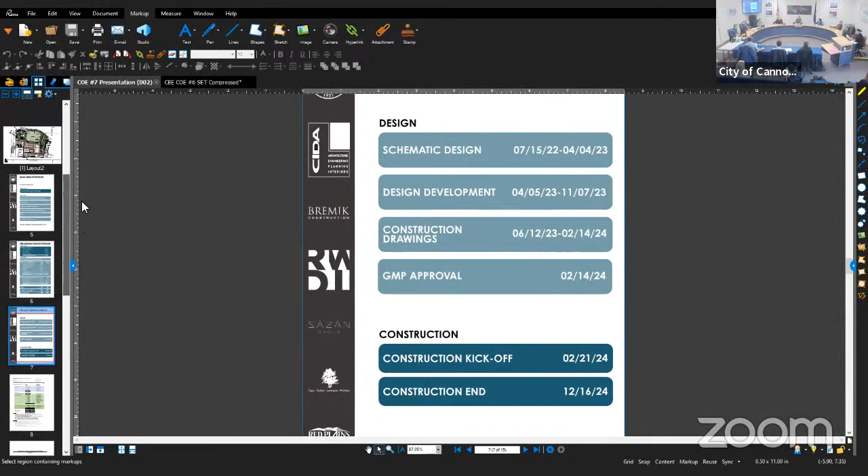It's on a previous slide, but what happened is that Bremik is working with us right now, and they're paid a fee for this design work they're doing, putting together the bid packages, all those things. It's about $24,000 to $25,000. But once they get to the GMP part, they will be paid differently.

The technical relationship between the architect and the CMGC ends at that point, and you become the contractor. But we will continue to have the good relationship that we have. From that point, they'll be paid a certain percentage, I forgot what it was, but it was part of their proposal when they were selected, of what's called the cost of the work. That's a term of art - these things are part of the cost of the work, these things are not, you don't get paid for those. Right now we're still in the phase where they're just producing whatever needs to be produced in order for us to continue our process.

What's really important to reiterate again is that all the pieces of the project are bid out competitively on the market. We review all those bid results with the design team and with the Cannon Beach team as well. Then there's just a fixed fee on top of that that's been pre-negotiated based on our competitive selection already. So it's a very open process, and we want to make sure everyone feels and understands that they're getting the best value.

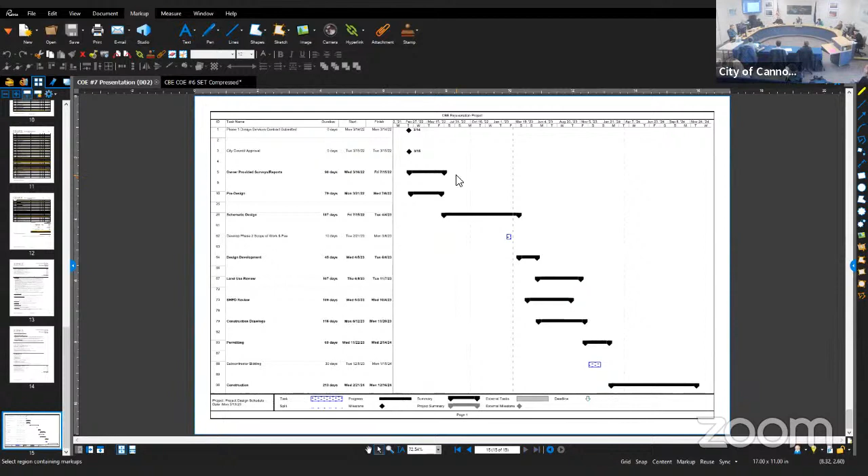The last thing I wanted to point out on schedule - I told you I'd bring up a simple Gantt chart, but this is what the abbreviated schedule you saw previously is based on. These black bars represent periods of time, so you can see where they overlap vertically - multiple things are being coordinated to happen at the same time.

If we look down here, I'm just going to circle these for you. We've got land use review happening concurrently with the State Historic Preservation Office review and Doug Doerr's team with the field work, and then construction drawings.

The land use review process is 30 days for completeness review, then 120 days of actual review process. But between the completeness review and the actual review, it's probably going to come back to us saying we need additional information on this and this. We resubmit it, that's probably a couple of weeks. Long and short of it, it's a lengthy process - 5 or 6 months.

But it doesn't have to be lost time. We can be developing our construction documents as soon as we're in for land use review, so that when we get our land use approval, our notice of decision with conditions of approval, we'll be ready to roll into construction documents shortly after that.

We need some time to be able to incorporate design revisions that speak to whatever conditions of approval we have from the planning department, the engineering department, and the fire department.

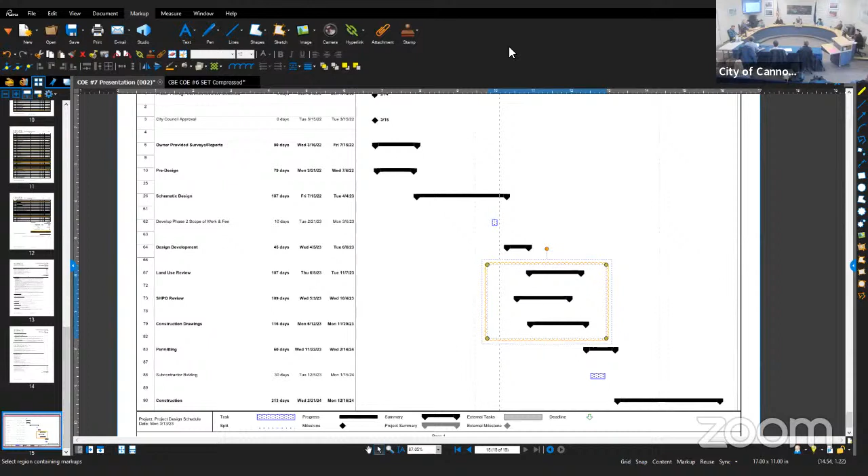Uncharacteristically quiet. I'm thinking how we can move forward. There's probably not a lot to discuss right now. We have a discussion tomorrow about a project that's even higher cost.

And the date tomorrow is what, the 14th? I think it was the 28th that we can sit down, hopefully with our financial advisor, and talk about - there's going to be a gap to fill on this project between what we've already collected in the TLT and what our future collections are likely to be. Then there's going to be, you can buy that much debt service - with that debt service you can buy this much of the project - and then there's going to be another amount that we need to make up or reduce in cost.

When are we going to have - that's just what I'm really curious about is the gap. I'd like to, so we can start thinking about funding sources - do we have any idea what that gap is right now?

No, on the 28th we will. We just got these numbers and we're trying to set something up with our financial advisor and trying to get ready. I don't know exactly how long that would take, but if you want to try to make it earlier than the 28th, it's just another meeting.

I would say we would need at least a week, 10 days. So we're almost there. Yeah, because that's the big issue, obviously, for all of us: how do we make up the gap and how do we make it up if we want to go forward with, which essentially is a $12 million project if you take the high end of it.